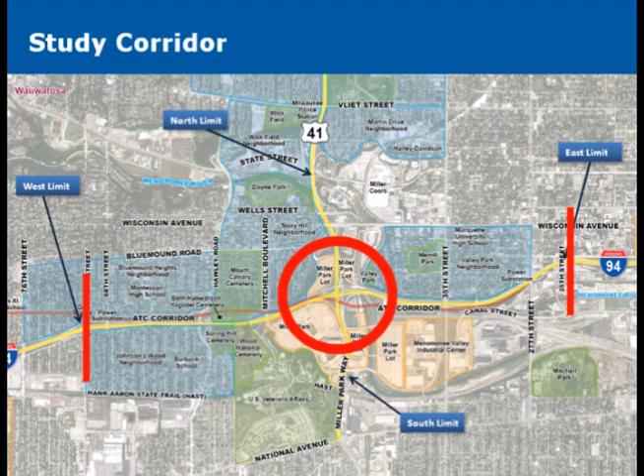The Wisconsin Department of Transportation, or WisDOT, is performing a study of the I-94 east-west corridor in Milwaukee County. The corridor stretches about 3 miles from 70th Street to 25th Street in Milwaukee, and includes the Stadium Interchange, or US 41, between State Street and Canal Street.

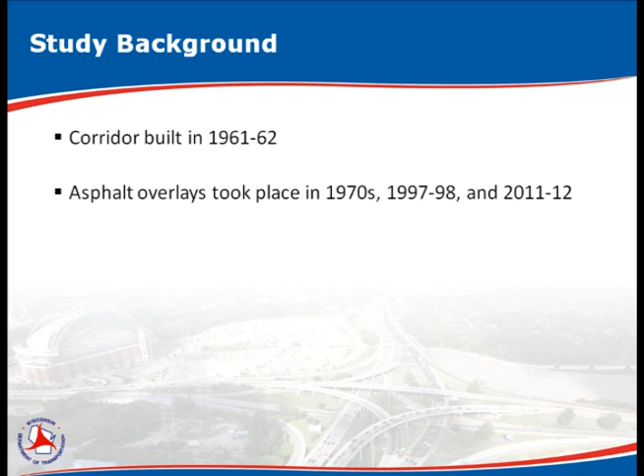This freeway was built in the early 1960s, and WisDOT has performed numerous repair projects over the years. The freeway design is outdated, crash rates are relatively high, and the pavement and structures are in need of replacement. Now is the time to plan the future of this important freeway.

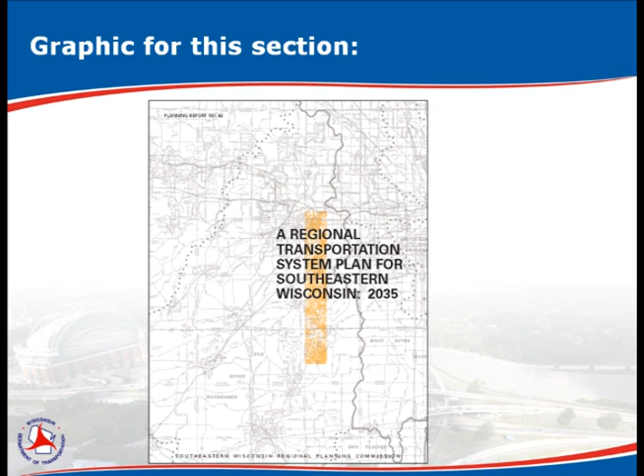Past studies looked at various options for this freeway segment, including transit and rail improvements, as well as expansion. This new 2-year study will conduct a full and open public involvement process. Your input is needed to help WisDOT's team identify transportation improvements while striving to balance community interests and environmental challenges.

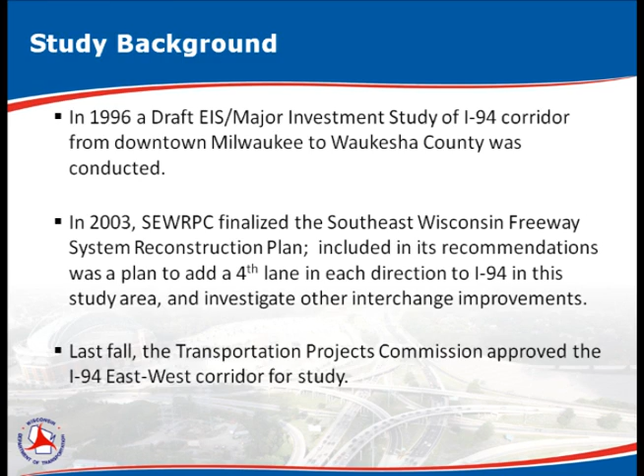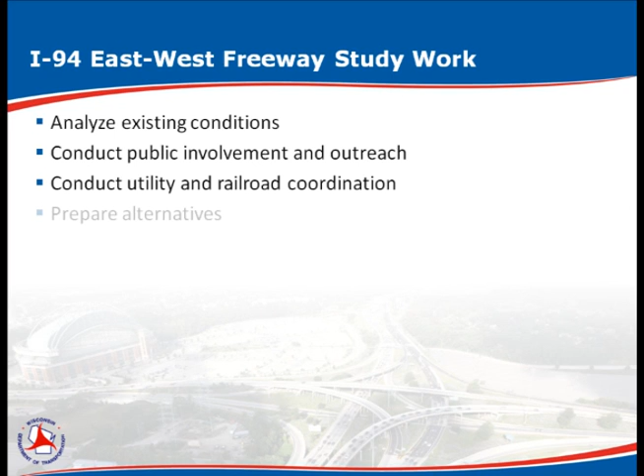The study is aggressive in terms of its scope and schedule. The team will solicit input from residents, businesses, workers, and commuters who live near I-94 and use it regularly. WisDOT will work with utility and railroad partners, along with the municipalities served by the freeway. Many options will be evaluated, and a thorough environmental review will take place.

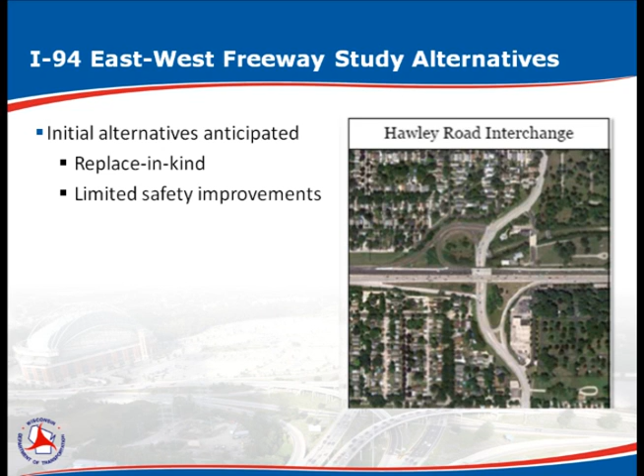The team will investigate 3 main options: replacing the interchanges and freeways as they exist today, conducting safety improvements in some spot locations, and redesigning to current design standards, an option that will not preclude building additional lanes.

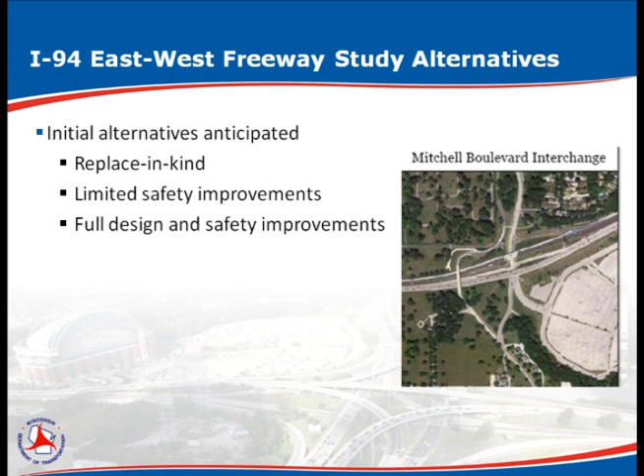The department's goal is to remain within the corridor's existing footprint to the extent possible. Ideas from the community will help shape the range of alternatives developed as part of this study.

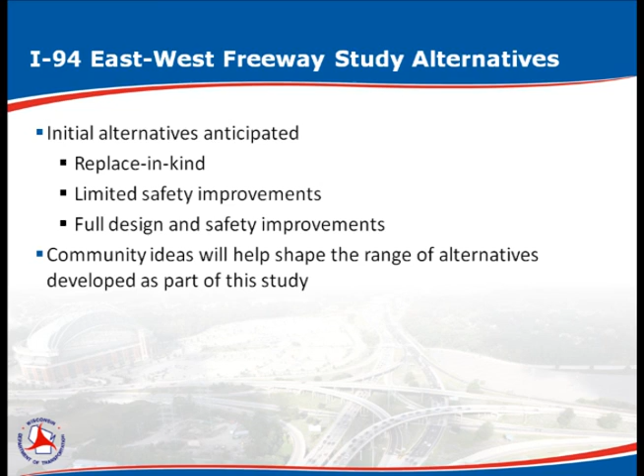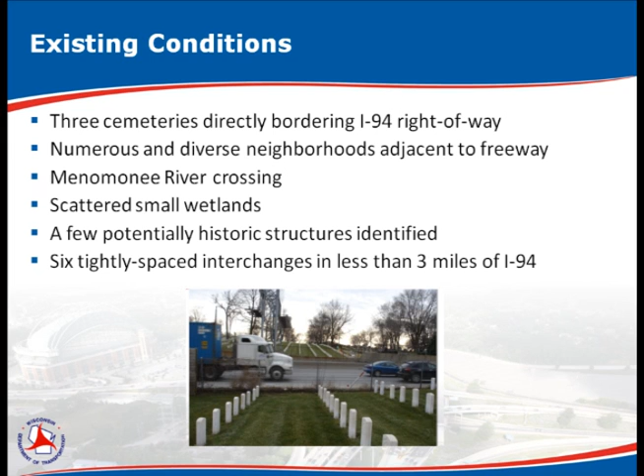The study presents many unique challenges. There are cemeteries, neighborhoods, river crossings, wetlands, historic structures, and tightly spaced interchanges that are all within this 3-mile segment.

The study began in mid-2012. The team will spend 2 years working on the environmental and engineering study. Final design and coordination will take place between 2014 and 2018. The earliest construction could begin is 2019, based on receiving the necessary funding and approvals.

The Wisconsin DOT is reaching out to a number of stakeholders to foster open and honest communications. The study process will provide many opportunities for input in a variety of settings.

The environmental study will look to answer questions in several areas, including: why is the project needed? What is the range of options considered to address purpose and need elements? What is the affected environment? What natural, socio-economic, and other resources are present in the corridor? What are the potential environmental impacts?

Finally, the study will address public comments and coordination, such as how, when, and where did WisDOT engage the public, review agencies, and other stakeholders as the study was conducted.

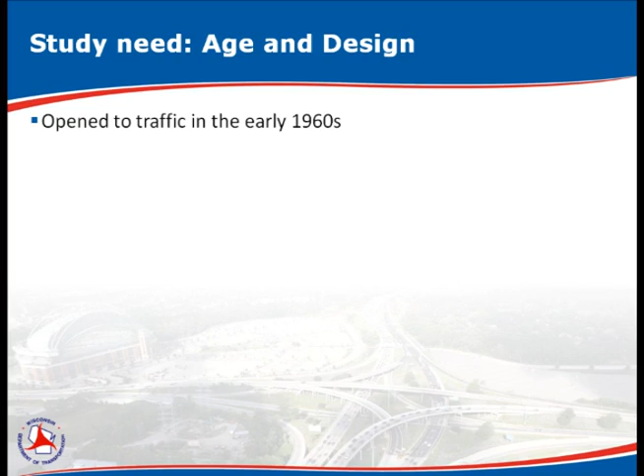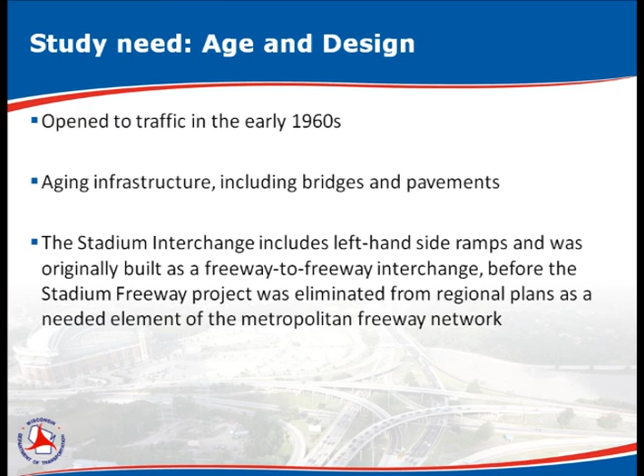Because this segment of freeway was opened to traffic in the early 1960s, there is an aging infrastructure, including bridges and pavements. The study will evaluate ramps and underpasses originally built as part of a freeway-to-freeway interchange design. Current traffic volume along the corridor is about 160,000 vehicles per day.

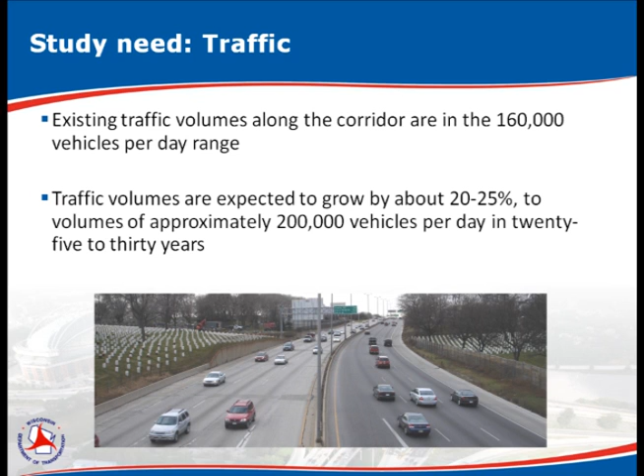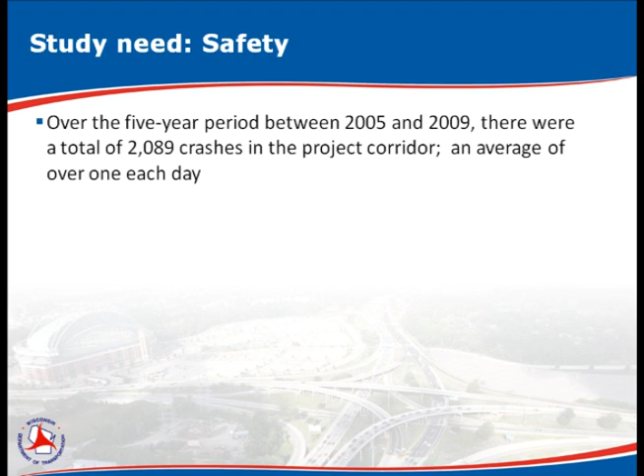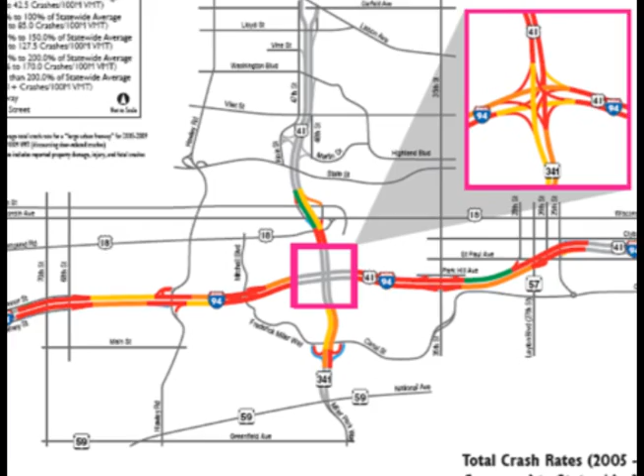Over the next 30 years, traffic volume is expected to grow to about 200,000 vehicles per day. Between 2005 and 2009, there were over 2,000 crashes along the project corridor, an average of more than 1 per day. Several factors contribute to the crash problems, including congestion due to high traffic volumes and traffic conflicts, including weaving, narrow shoulders, obsolete design, and limited visibility.

I-94 is a vital link in Wisconsin's overall transportation system. The interests of residents, businesses, commercial traffic, and event traffic will all be considered during the planning, design, and construction phases. The study team will work closely with the City of Milwaukee, the Milwaukee Metropolitan Association of Commerce, and other groups to enhance economic development in the corridor.

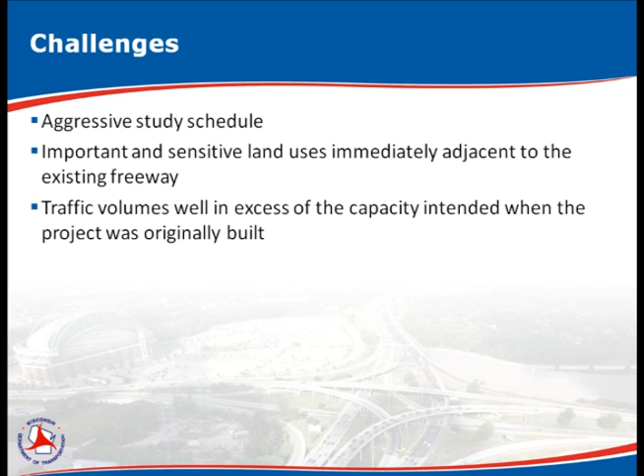The challenges include an aggressive study schedule to address deteriorating pavements and bridges, sensitive land issues adjacent to the existing freeway, high traffic volumes and crash rates, and tightly spaced interchanges that can create difficult maneuvers for motorists.

Over the next few months, the study team will compile and analyze input gathered from community workshops and develop broader corridor options to be presented at the next large public meeting, expected to occur in December 2012.